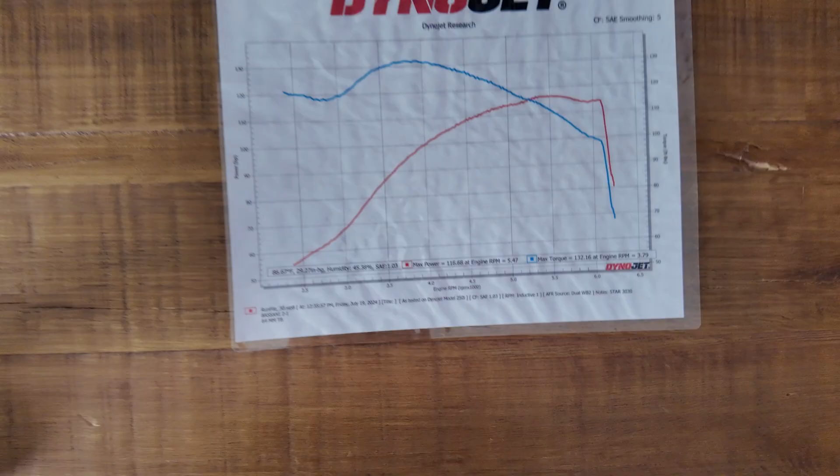So let's go over and take a look at the dyno sheet that they gave me. All right, here we go. So here's the sheet, a nice little laminated sheet that they gave me. It's pretty cool. On this side is the horsepower, on this side is the torque, and you can see where the lines in the graph intersect. Also let's take a look down here - this is what everybody wants to see.

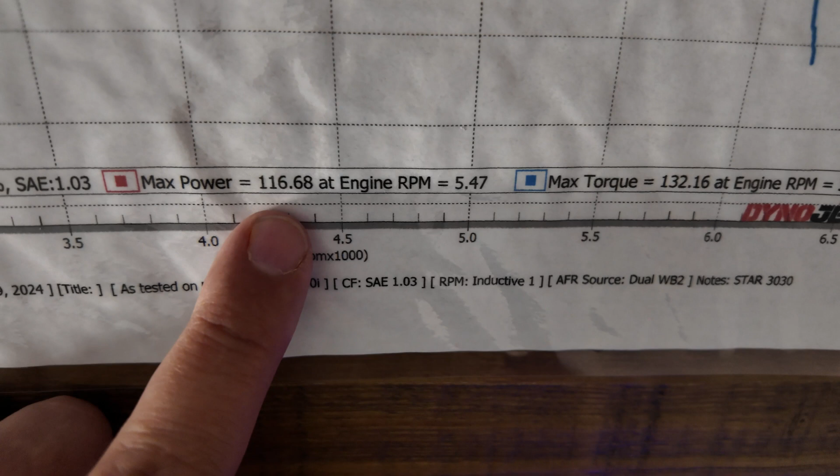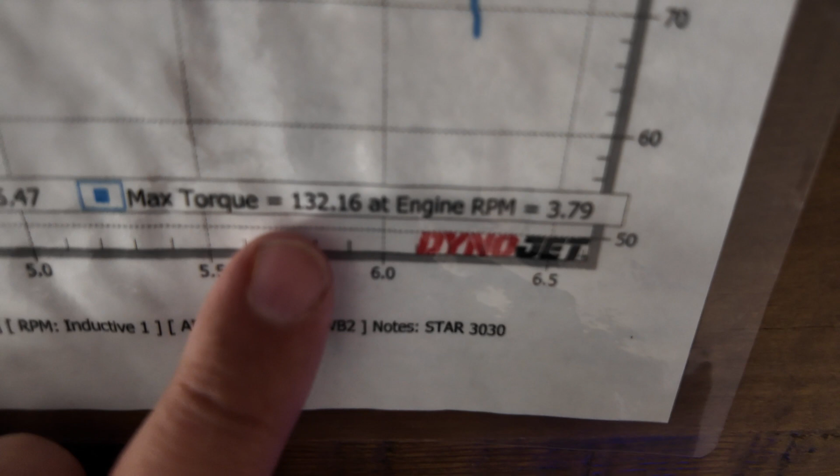So the max horsepower came in at 116.68. I've just been rounding that up to 117, I think that's what I've told most people. And we move over here to torque - it's showing 132.16. So out of that, we got 117 horsepower, 132 torque. So far, I am super pleased with the result.

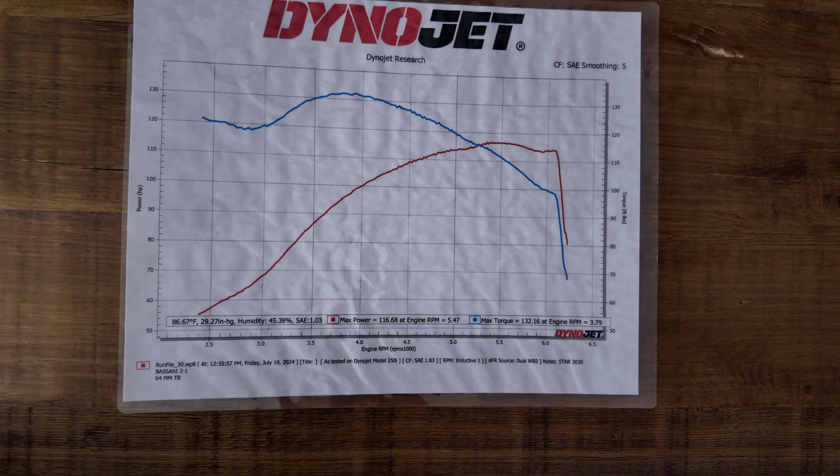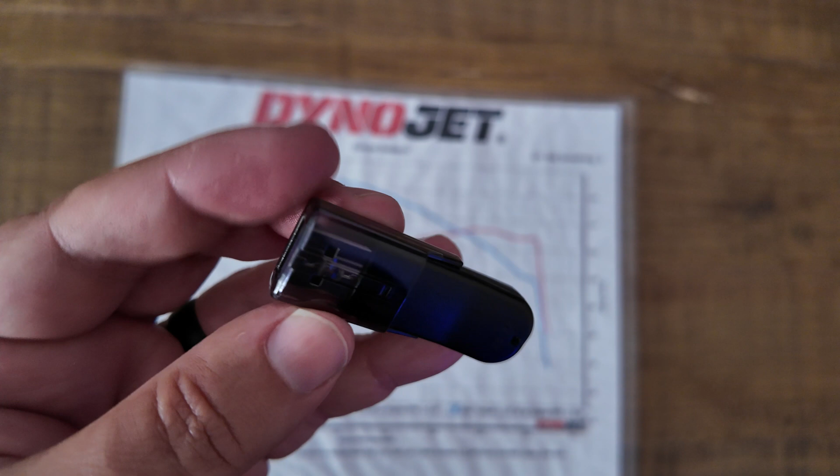Not only that, they gave me this cool little memory stick with the tune on it. That way, if something happens while you're traveling, take this with you. If any repairs have to be done, all the tune is on here and ready for you to take to whatever dealership you've got.

So I know after all that, you're probably wondering what is the final cost, Ty? Give us the final cost for the project. And here it is. So with the stage 2 build, excluding the exhaust that we talked about earlier - the Bassani 2-in-1 - but including the dyno tune, it was $3,748.49. That was the cost for the whole project.

So the question of, was it worth it? That is going to be different from person to person. That question is completely and totally subjective when it comes to the value of something like this. Now for me, yes, it was absolutely worth every penny. It is such a fun motorcycle to ride, and when you add this stage 2, it just elevates that so much. It's such a great motorcycle.

Now I would like to add this. Moonshine Harley-Davidson is kind of known for this type of stuff, and they're close to home for me, but they are known for big engine builds and modifications, and they do a fantastic job. Nothing to take away from them.

But what I'd like to tell you is this: if you are in the Chattanooga area, near the Chattanooga area, or want to travel there, you really should give Thunder Creek Harley-Davidson a shot. If nothing else, give them a call, let them work up a quote for you, and see what they can do. You can talk to my buddy Jathan, my buddy Waldo, or Teresa. Any of them over there will help you out. They have done a phenomenal job on this build, and I am super happy.